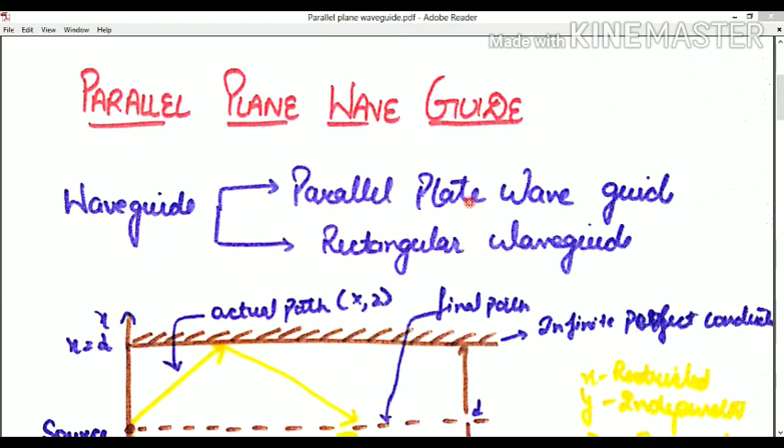So basically, waveguides we can define in two parts: a parallel plate waveguide or a rectangular waveguide. So we will study first about the parallel plane waveguide, also called the parallel plate waveguide. Okay, so let's see in the parallel plane waveguide what happens actually.

See, this is a basic structure. The wave is transmitting in the z direction from the source to the destination. I've told you that a waveguide is a structure in which the wave travels. So here the wave is traveling and the path it is following is a zigzag path, from the source it is following basically a zigzag path.

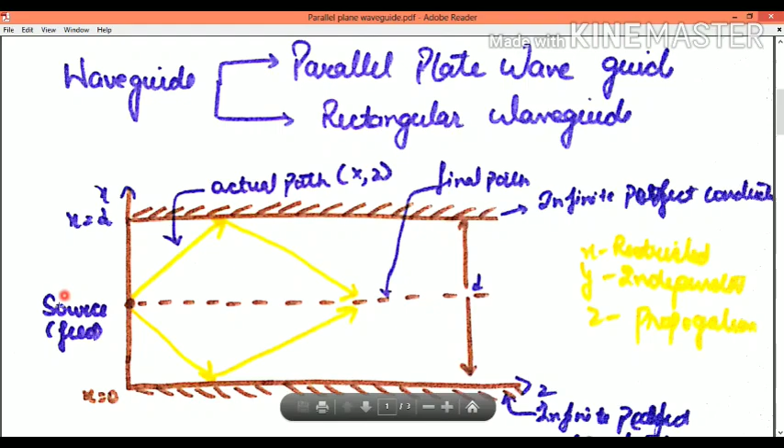See here the space between the two conductors, these are infinite perfect conductors, or we can say parallel plates. The spacing between them we have denoted as d. This is the x-axis, this is the z-axis. We have started where x equals 0. We also sometimes call the source the feed point.

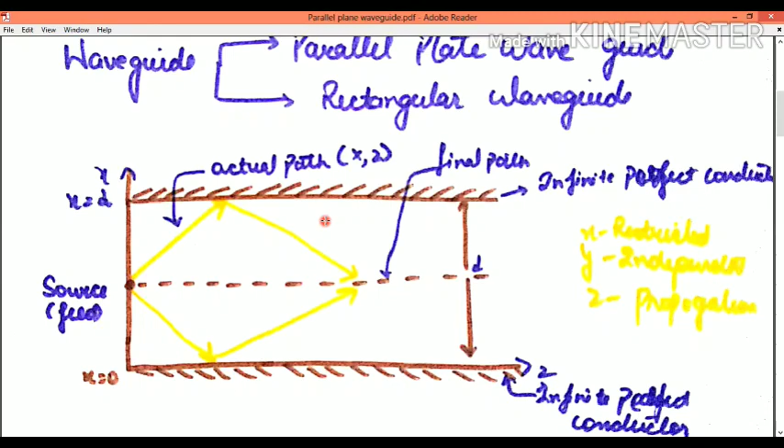Okay, so basically, if I want the EM wave to hit between the plates and reach the destination without losing energy, we will study how we can transmit a wave without losing energy. But before that, first of all I want to give you an example of this parallel plane waveguide.

See, this is our earth and this is the ionosphere. The main example we can say is the duct propagation between earth and ionosphere. The wave always interacts between earth and ionosphere like this. It always follows a zigzag path.

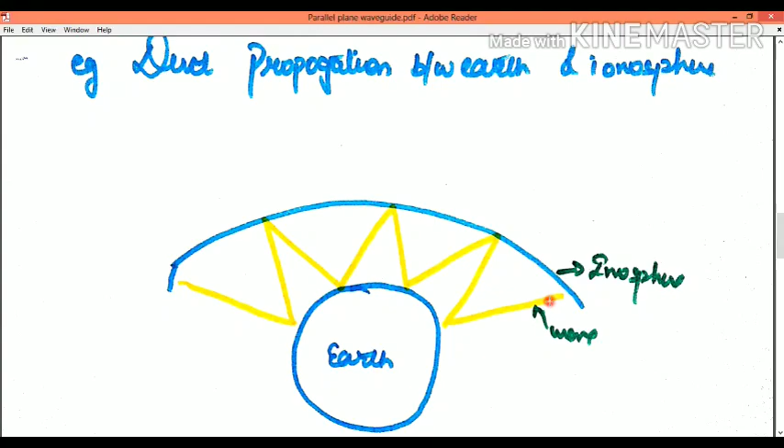Now we'll study some basic things. Suppose I want the EM wave to hit between the plates and reach the destination. How is it possible without losing energy? The distance must have a certain value: d equals m lambda upon 2 cos theta. This will satisfy the boundary conditions such that it will not lose any energy.

So d is the spacing between the two plates, between which the wave travels and follows the zigzag path. m is nothing but a discrete number. So if the spacing d is m lambda by 2 cos theta, it will not lose any energy. If we put m equals 1, then d becomes lambda by 2 cos theta. If m equals 2, then d becomes lambda by cos theta.

In these cases the wave will not lose any energy. And how is this possible? I will twist the equation like this: cos theta equals m lambda by 2d. Now we are considering d to be fixed, and this way we have a launching angle, theta.

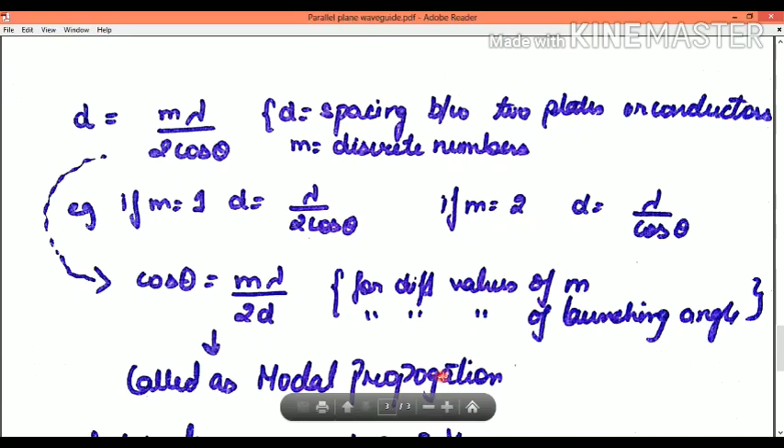Okay, when you are launching for different values of m, you will have different launching angles for the distance between the plates. For different values of m you have different combinations. This is what we call modal propagation.

One more thing, you know that for a fixed d, the maximum value of cos goes to 1. It means if you keep changing the value of m to 1, 2, 3, 4, and so on, there will be a finite number of m for which the condition, that the wave is able to travel, is satisfied. So finite m will be calculated as modal propagation.

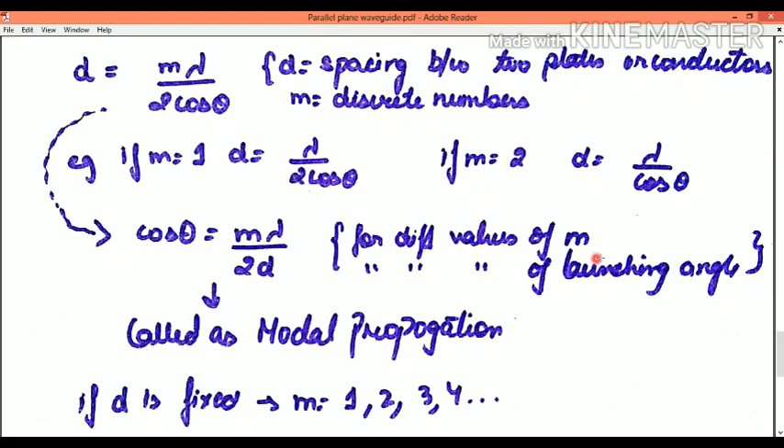Now we have understood the basics of plane wave propagation. Let's conclude. The spacing between the two plates should be fixed. If you are changing your distance, it should be a multiple of the wavelength, or you can change the launching angle such that we will not lose any energy and reach the destination point. So we have learned three things.

In the next video we will learn the basic derivation, and we will learn the different modes we have to use in this criteria.